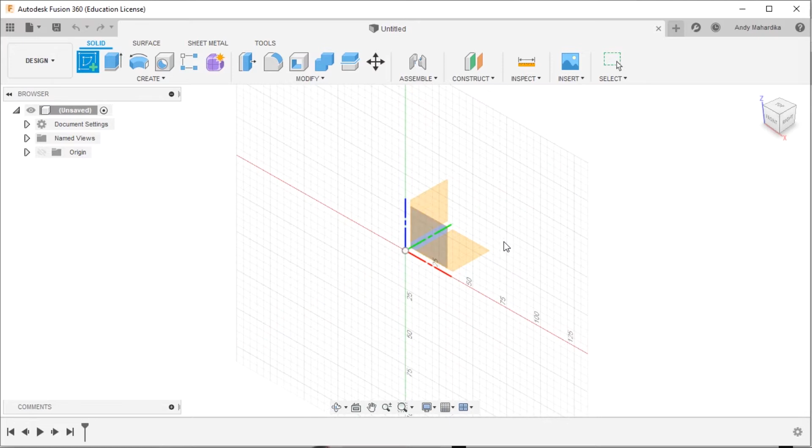We click sketch and select the top plane. First, we make a circle sketch here. For the dimension, click D for the shortcut, and make it 6 mm. Finish the sketch. We will extrude this sketch to let's say 14 centimeters, or 140 millimeters.

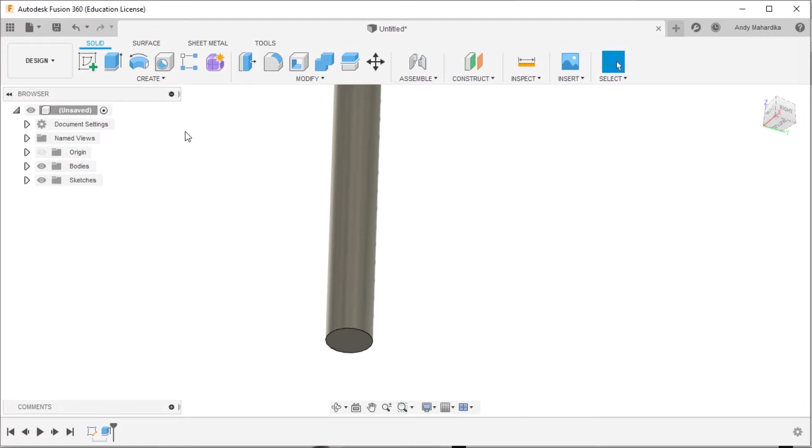In this video, I will make a Phillips screwdriver. So we'll make a cut here on this edge for the screwdriver point.

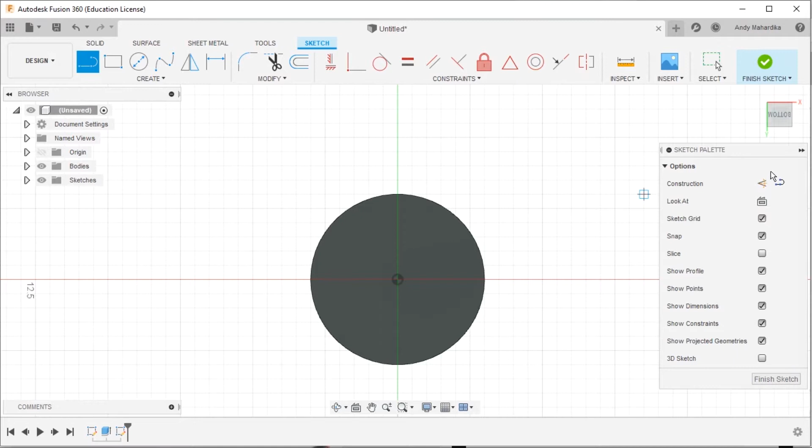We'll make another sketch. Click on sketch, and select this plane for the next sketch. First, I'd like to make a center line and make it a construction. Just click the sketch and make sure you click this icon here on the right to make it a construction.

Okay, just turn it off and make a triangle with this. Oops, sorry, let's undo this. Let's make a triangle, but not to this center point, okay? I'll make it just a little bit higher than that, like this.

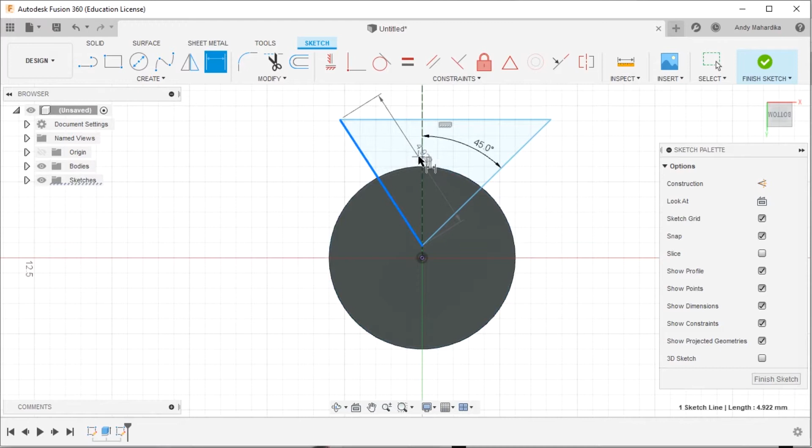Click, right click and okay. Make this horizontal. And for the dimension, click D. Let's make this 45 degrees. Also for the left side, make it 45 degrees. And the dimension from the center to this triangle edge, I'll make it 0.3 millimeters.

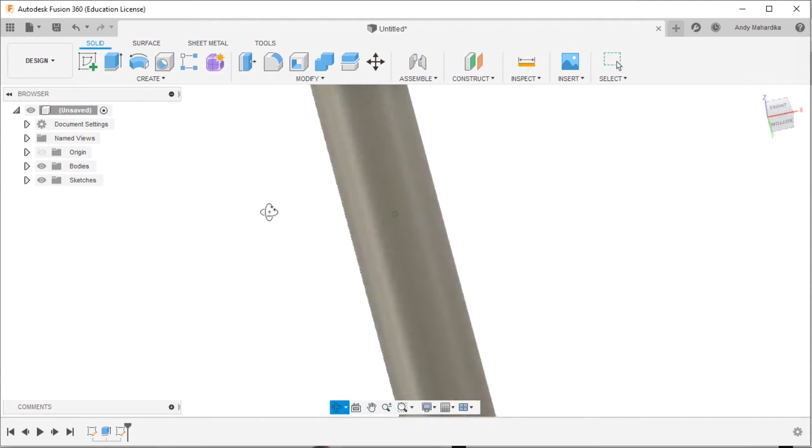Okay, then I finish the sketch. We will use this sweep command to cut this cylinder to make a Phillips screw profile.

But before that, let's just make another sketch, a second sketch for the sweep. First, create sketch. We will use this plane, the right or left plane. I will use the spline to make this. Just make 3 points like this. The dimension will be from this center. I will make it maybe 8 millimeters.

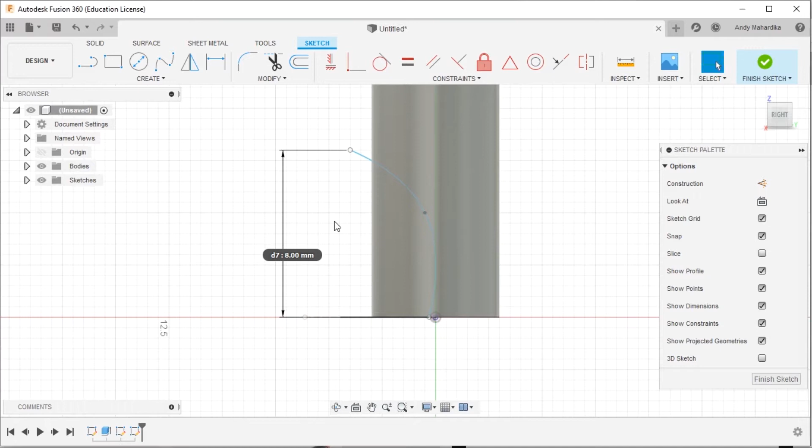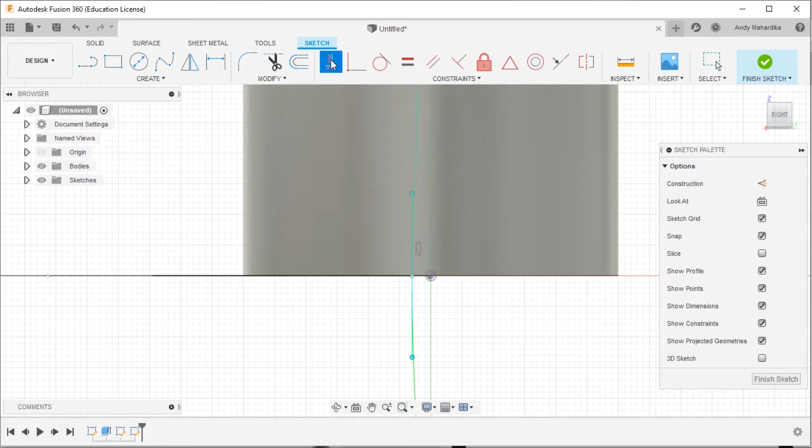Right click. And for this point, we can see this line here. We'll make it a vertical line. Just click the line here, see this line, then click the vertical constraint. Okay, right click and then okay.

Just make sure the line is pretty good for you, like this. Okay, you can see here the line is moving here, the dot here. Before we make a sweep, you need to make sure the line between the two sketches is connected. If you didn't do that, probably the sweep command will not work properly.

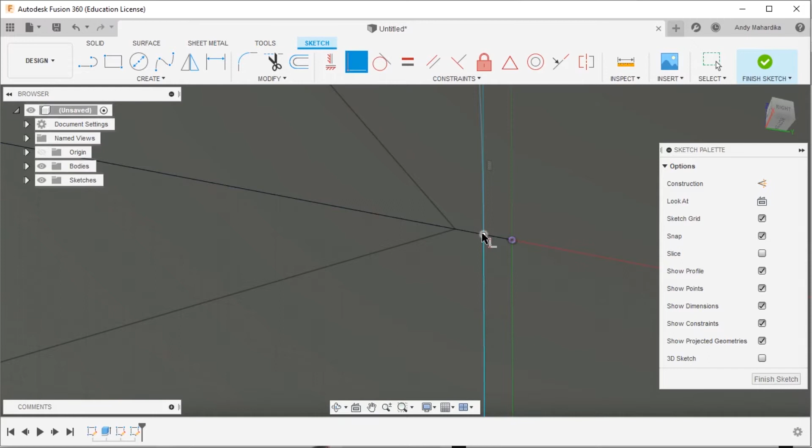Then we click this line, and then the second dot here. Okay, click this coincident constraint, and then select this dot here, and then the second dot from the first sketch. They will be joined together. Let's see from the right side. Right click and OK.

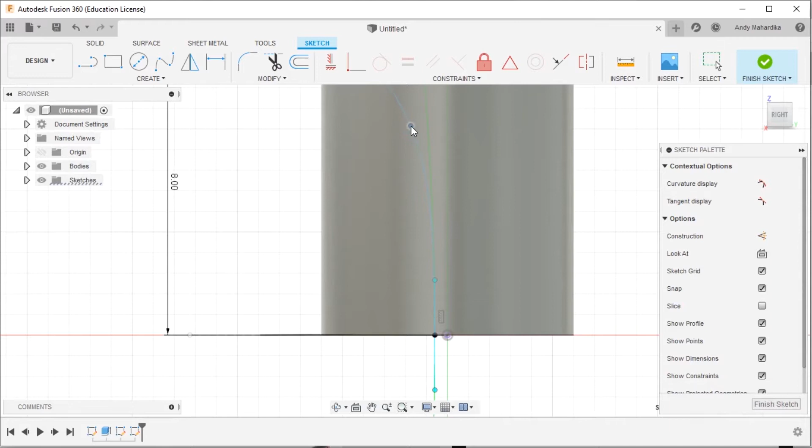If you're satisfied with the shape, you can just stop there. Finish. And then now we'll do the sweep. Create, sweep.

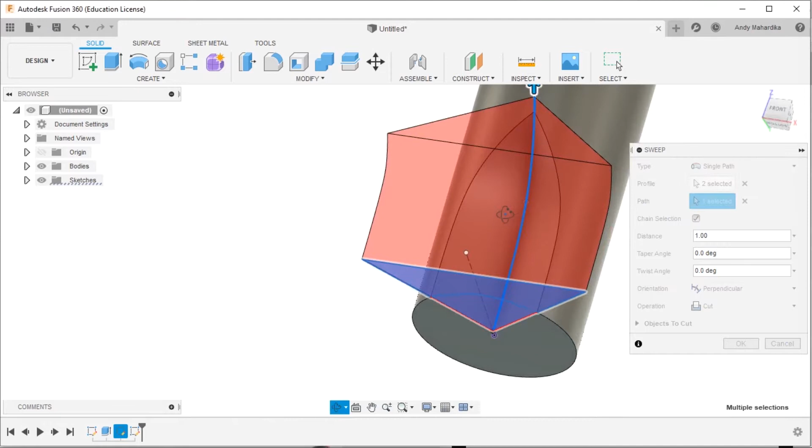Now we select the profile we want to make, this one. We use the single path. Profile here and here. And then the path, we use the second sketch we made, this one. Click here. See. Now we got this shape here. And then remember to select this operation into cut. And then OK. Now you already see we have a cut section here.

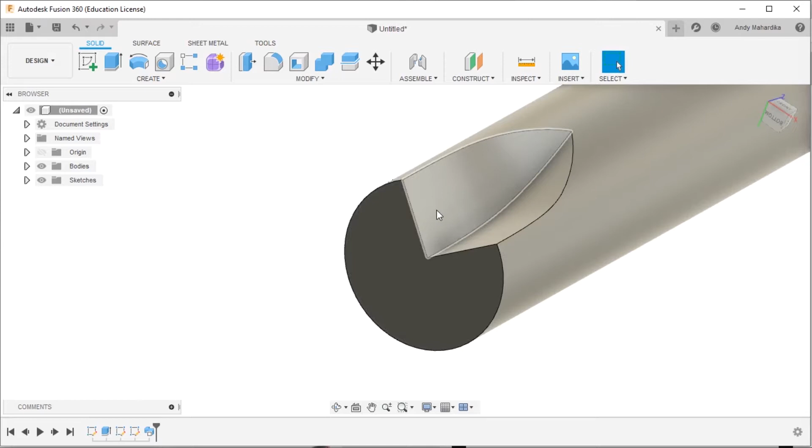Then we need to make this on 4 sides here: 1, 2, 3, 4. So we'll use this command, like this pattern, a circular pattern here. Go to create menu, then pattern, then circular pattern. Then select the object. Instead of faces here, I will select a feature.

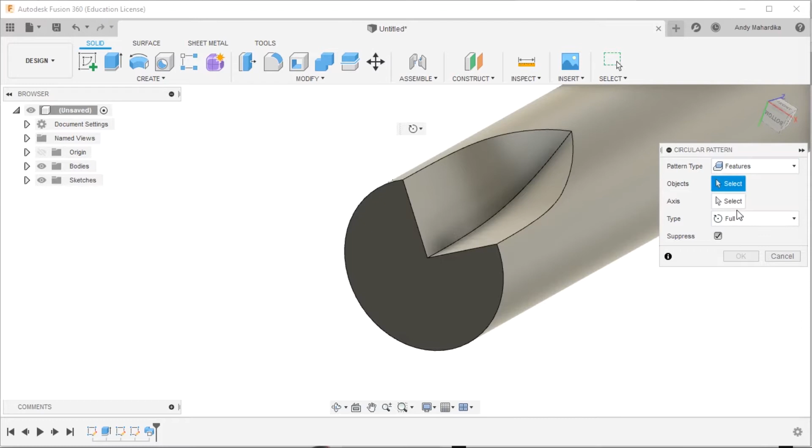And then the object we select is here, this one. And then the axis, we'll use this z-axis here, the blue one. Make it 3 - oh, I'm sorry, make it 4. You can see, and then okay. You can see there are 4 sides. And then we'll use modify here to make a chamfer.

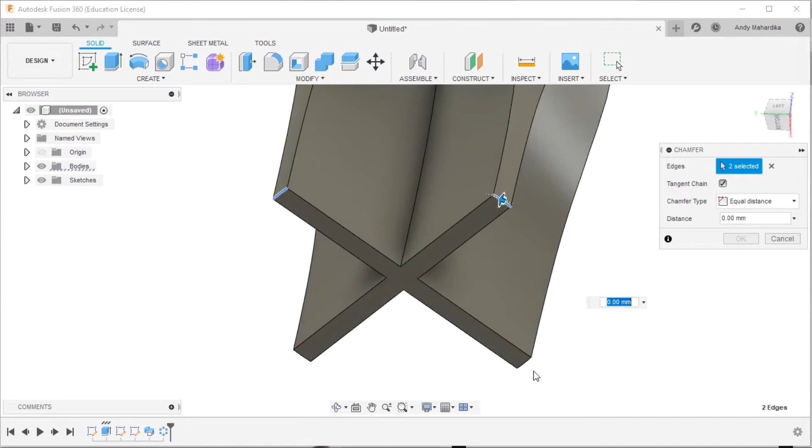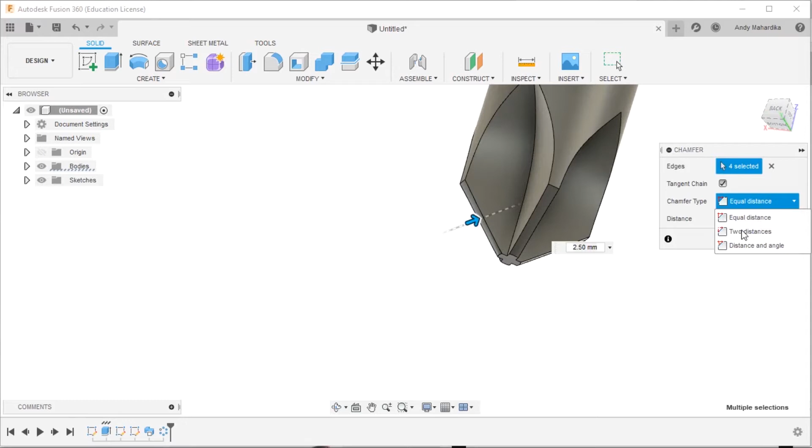Chamfer for every edge of the screwdriver here. Just make sure you select all 4 of this corner. See here. Instead of making this equal distance, I want to make this 2 distances here. The first one, I want to make it 5 millimeters. While the second one here, I want to make it like 2.6 maybe.

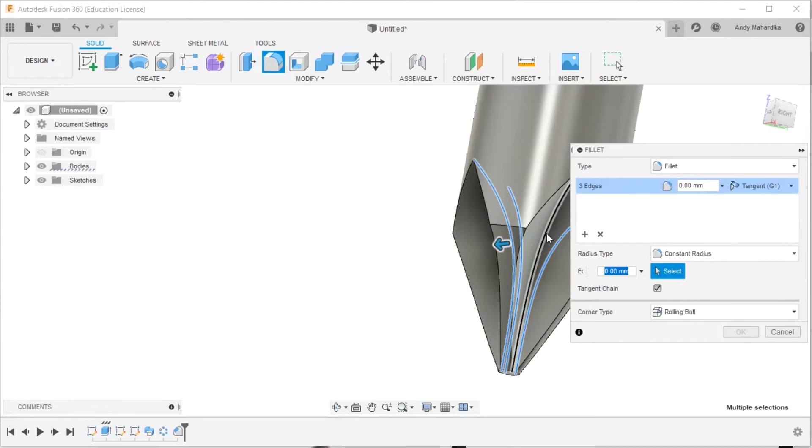Now the screwdriver tip is done. So I will make this a little bit rounded on every edge of this. Just a little bit of fillet, make it maybe 0.1.

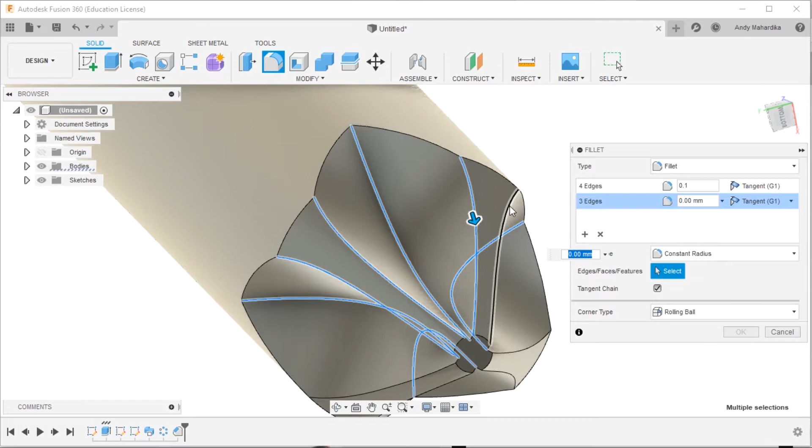I will add another one here, just to make another different dimension. You can click this plus sign here and add another fillet. We'll make another, maybe 0.05, a little bit smaller on the outside.

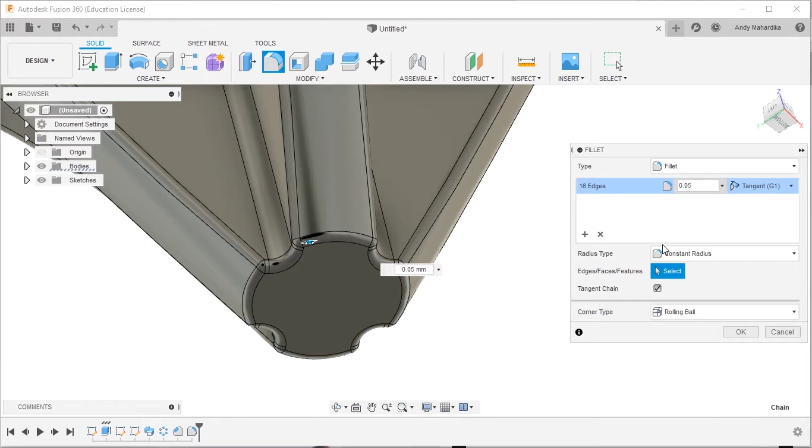And I will also make this edge into 0.1 millimeter. Oh, I think it's too much, let's make it smaller. 0.05, okay. No, okay, let's just keep it at 0.05 here.

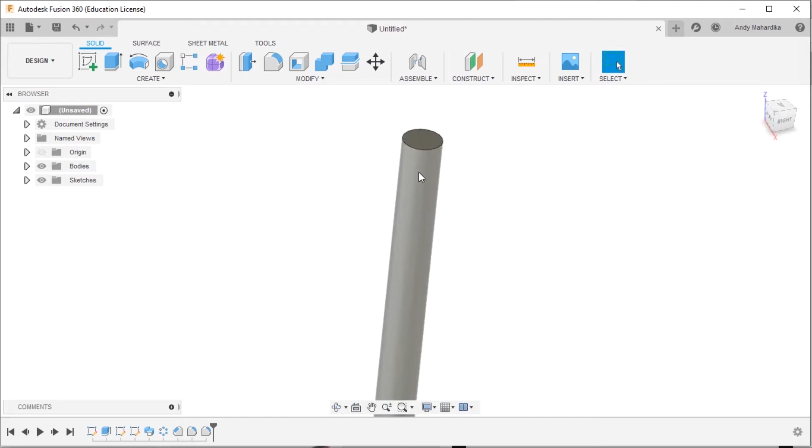Now the shape we already see here, we got this Phillips screw tip. And now, before we make the handle, I'd like to make sure that mostly the screwdriver always has like a flat surface on this joint between the handle and the tip here.

So I will make a cylinder - not cylinder, sorry, a circle here on the center. For the dimension, let's click dimension. I will make it just 8 millimeters, okay, maybe 10. Finish sketch.

Now we will extrude this sketch here. Instead of one side, I will choose the two side, or I will choose the symmetric extrude here.

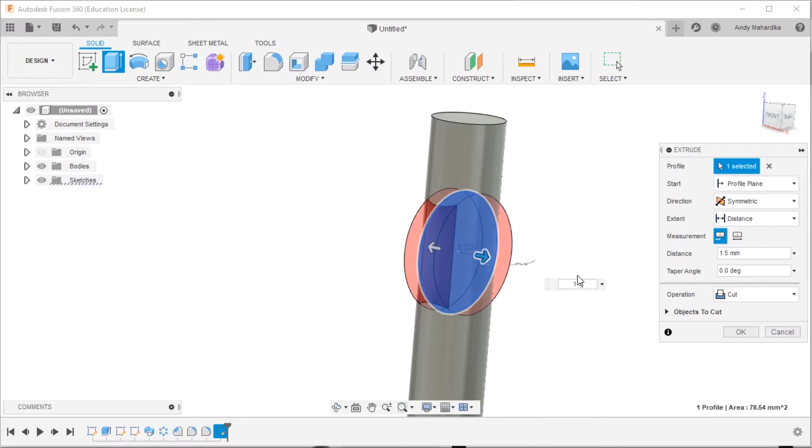The amount of this will make it 1 millimeter, 1.5. You can see here the extrude.

They already have the same amount between the right and the left because we use this symmetric option.

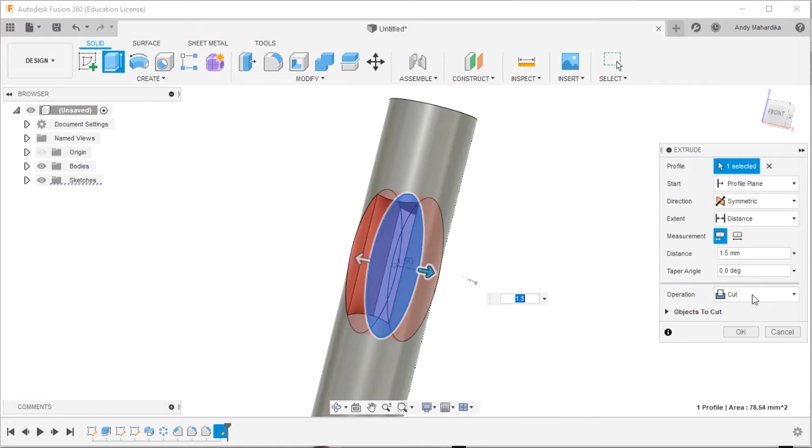This sketch will do a cut command here. For the operation, we'll change this into join, if that's okay. See, now we have a screwdriver tip here.

So next we will make a handle here. We'll make a sketch first, but for the handle itself I will make a different body part.

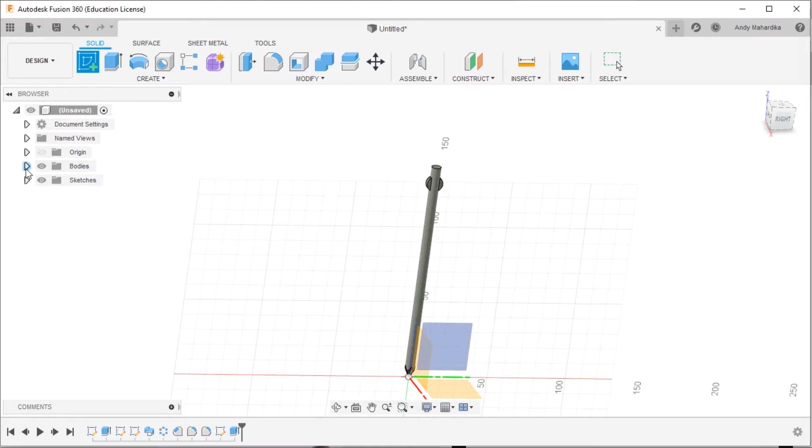So you can see here the first body we make, I will rename it into SD tip.

Oh, before that I will make a center line first. As usual, I will always use a construction line to make a center line. And then, okay.

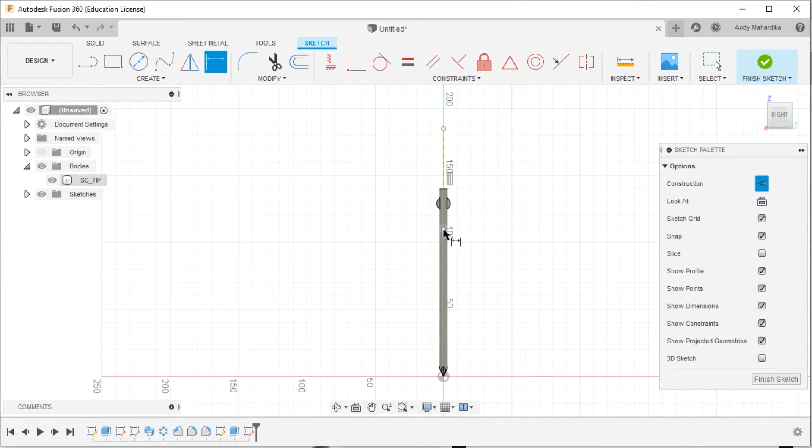We'll make a dimension here. From here to the tip of the screwdriver will be 90 millimeters.

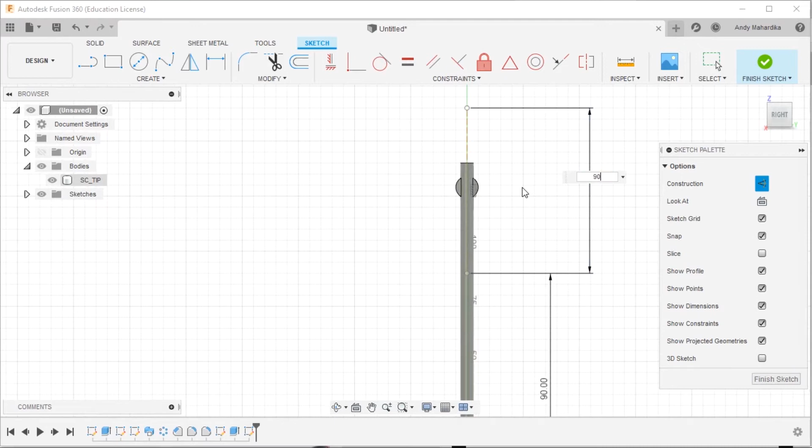And from here to here will be, let's say, another 90 millimeters. Okay, right click and cancel.

Now we'll make a sketch here. Oops, sorry, just turn off this construction button here. We'll make a sketch from this to this.

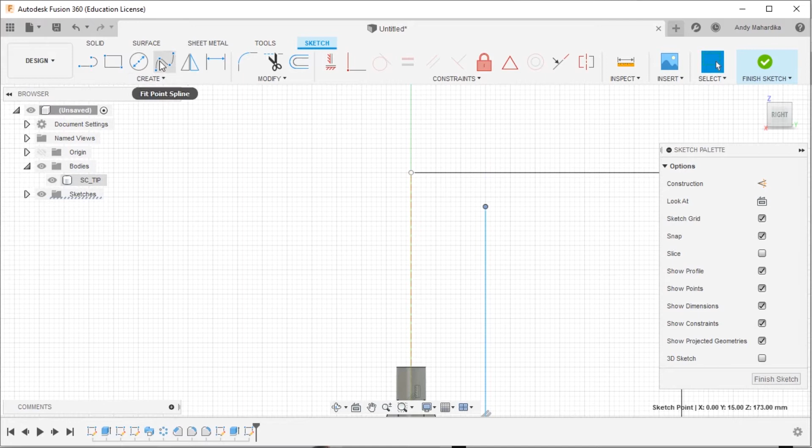Right click and then okay. I want to make a spline here for the end of the handle. Let's make it 3 point. Right click and okay.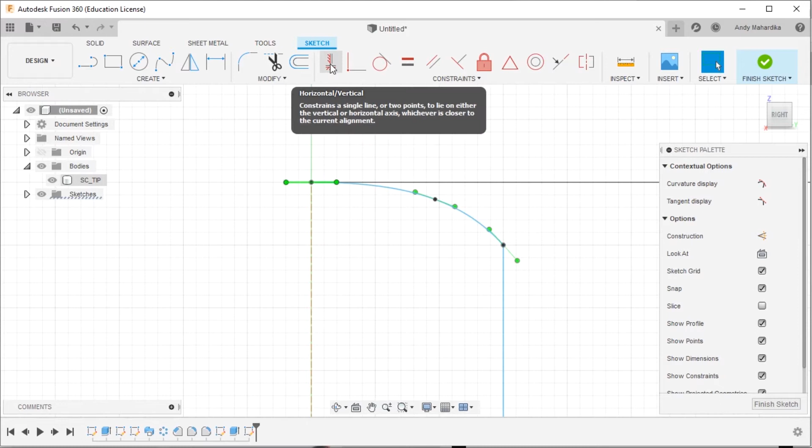Just make it a little bit higher. You can see this line here. Just make sure it's on horizontal, so I will select this horizontal constraint here. Right click and okay.

And I also want to make another sketch here for the screwdriver handle. Just make it 15 millimeters.

And the distance will be from here to here. I'll make it 15 millimeters. Right click, cancel.

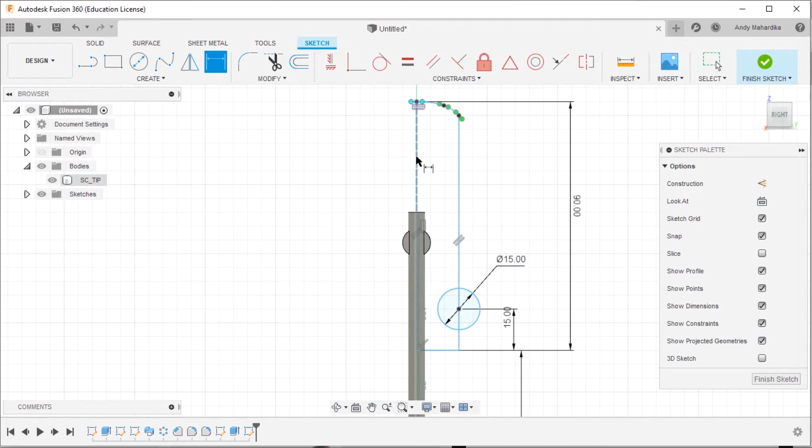You can trim this sketch or not, it depends on your need. Oh, I forgot to make the dimension from here to here, will be, let's say, 12 millimeters.

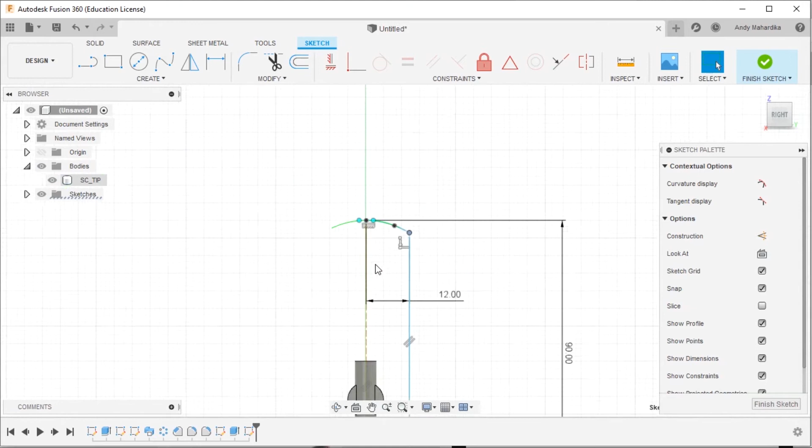Right click and cancel. Okay, we'll adjust here a little bit. Oops, seems like this.

I will make sure it's vertical with this line, with this dot here. Okay, just select horizontal, vertical, horizontal constraint, click this dot, and then this center dot here.

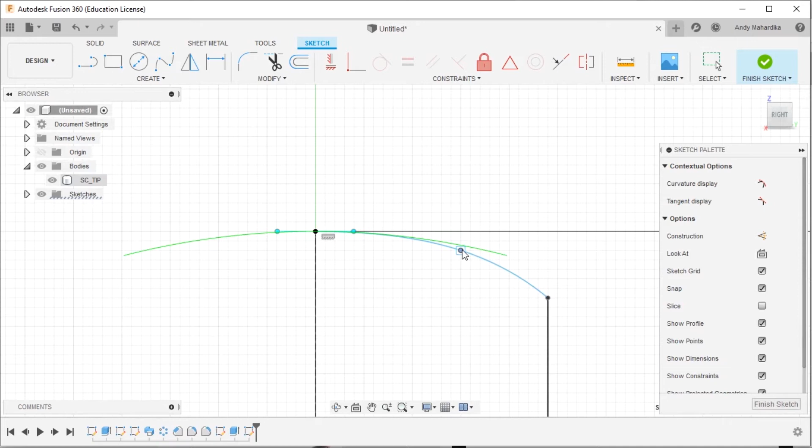Now you can see the line is collinear with this dot here. Right click and OK. Just make sure the sketch is good, and then finish sketch. Now it's time to revolve the sketch.

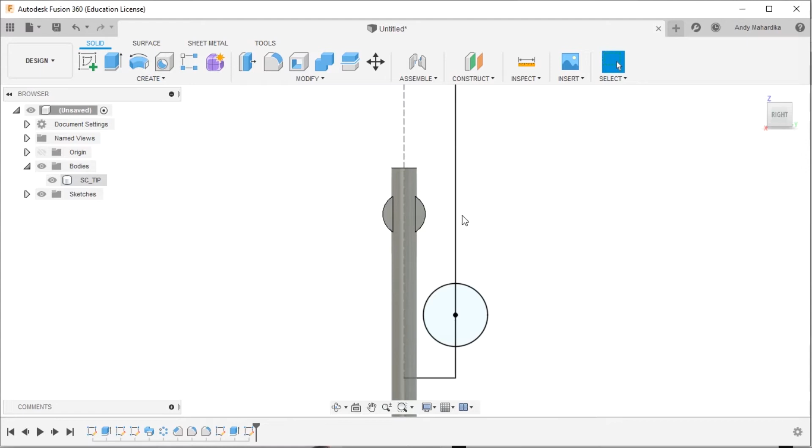Okay, now we have this revolve command here. Just click, and now we select the profile you want. Oops, sorry, cancel, I think right click, edit sketch first.

I think we need to change this into the non-construction line here. Just switch it off, finish. Okay, you can see here.

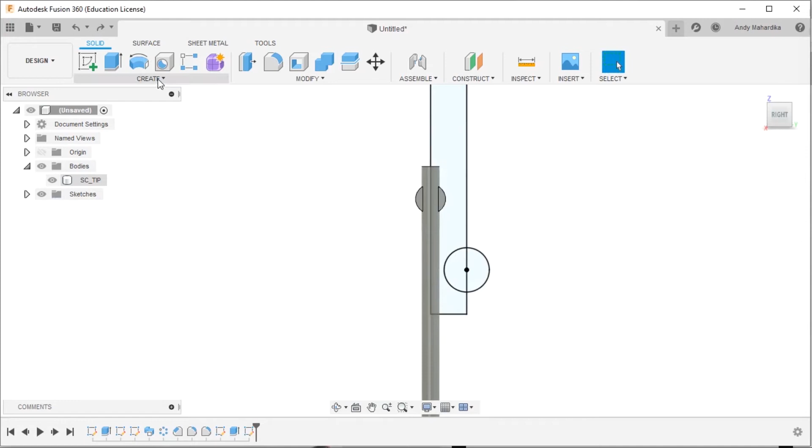And as for the axis, select the axis, and then we can use this sketch here. Okay, oops sorry, let's undo this. Revolve, select this profile, select the axis.

The operation will make this not join, not cut, but a new body. Okay, you can see here.

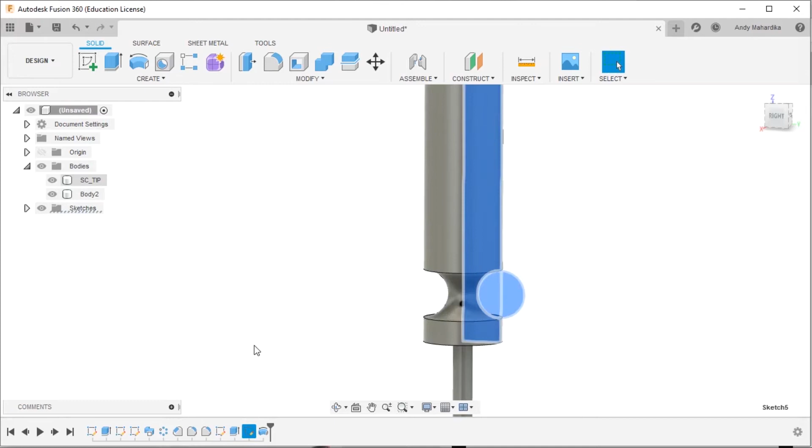Seems like this groove is a little bit bigger, so I will edit the sketch here. Right click, edit sketch, we'll make it smaller, like 10 millimeters maybe. Okay, finish sketch, okay, I think it's enough.

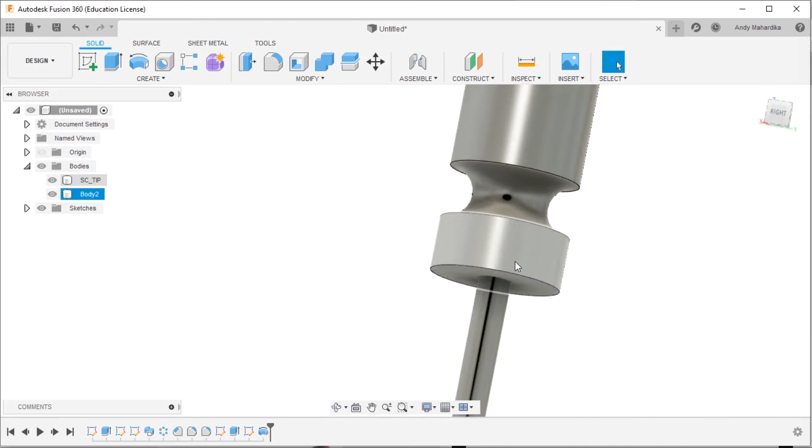Now the screwdriver is almost finished. You can see here the handle, but now we need another profile to cut this screwdriver handle, so you will get extra grip when you twist it.

Make another sketch. We'll use this plane here. I will use another circle to cut this. Dimension will be, let's make it 6 millimeter.

Okay, right click, cancel. I will also make this vertical constraint between this sketch and this line. Right click and OK.

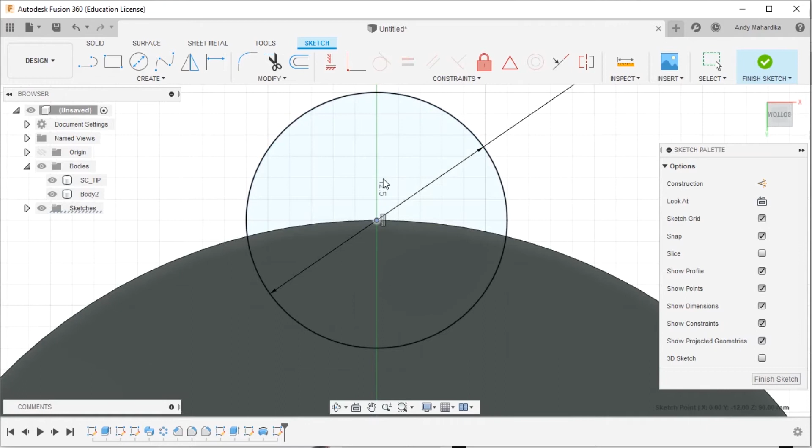To edit more sketch here, we need a circular pattern here, so I will make a sketch like this. Create circular pattern.

Let's select the object. This is the object, and select the center point here. We'll make it like 6.

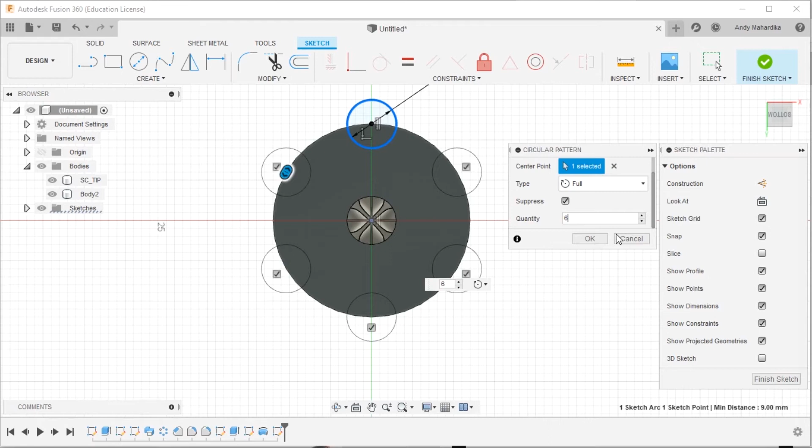And click OK. I think we need to make it a little bit bigger. Let's make it 8 millimeter. Oh, we'll just let it be 6.

Okay. Oh, 7 maybe, I will make it 7 mm.

Okay, finish sketch. You see here, and then all we need to do is extrude this sketch here, all of this sketch.

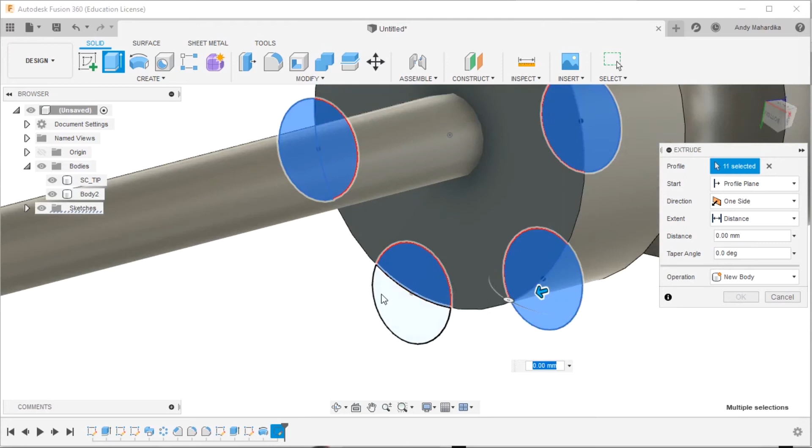We'll drag it to cut this here, all through the object, and then okay.

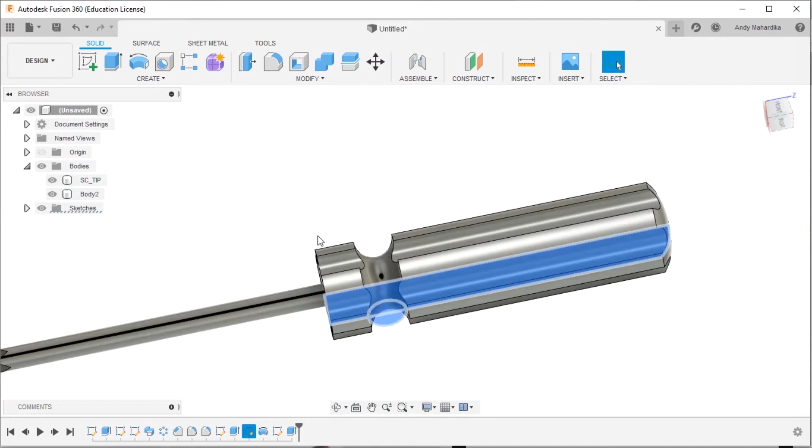It seems like the sketch is still a little bit bigger here, so I will return to this history. This one, okay, right click, edit sketch.

Okay, the size is pretty much good for me. And then we'll make a chamfer here, another chamfer on every edge of this handle.

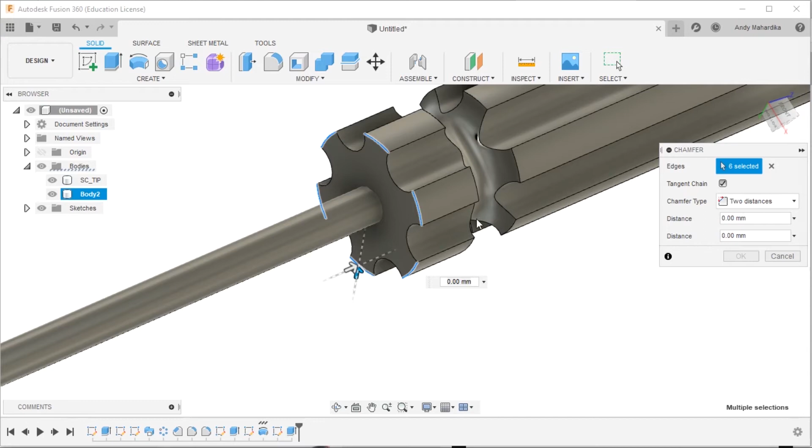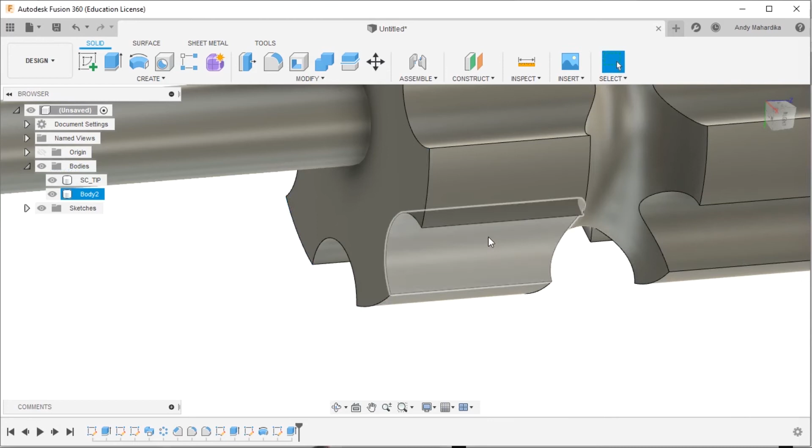Like before, I want to make two different distances between the chamfer. The first one will be... let's make it 3 mm. Oh sorry, there's some error, cancel. Maybe I will cut this part with another command. So on this revolve, I'll just edit it on the sketch itself. Edit sketch - it's a little bit too far. Maybe I'll make it 10 mm, and then I'll make a chamfer here.

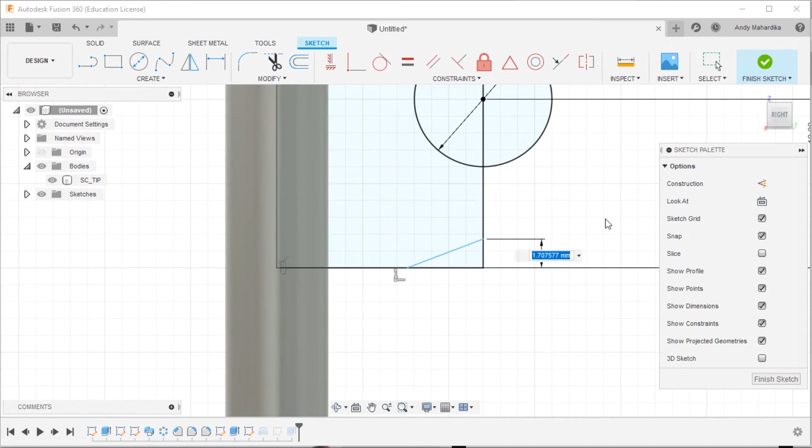Sketch, and then we'll trim. The dimension will be here to here, like 1.5. And here will be 4 - maybe just make it 6. Finish sketch.

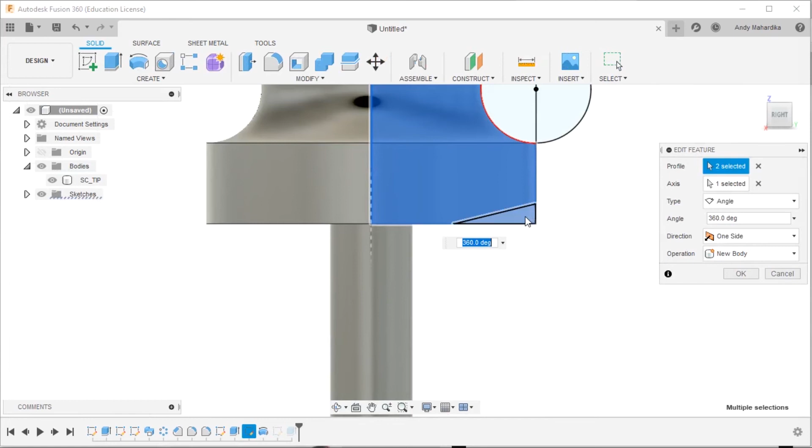The revolve, right click, edit the feature, and then deselect this part. Okay, now you can see this almost done screwdriver handle.

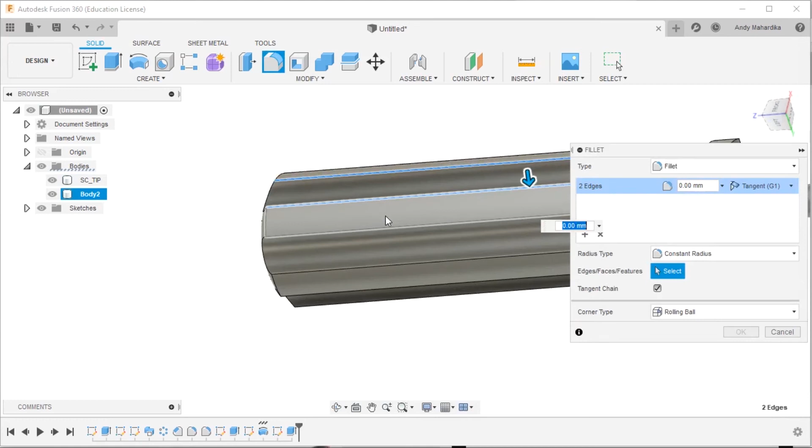I will add a little bit of rounding on every edge here. You can select like every edge of the handle here.

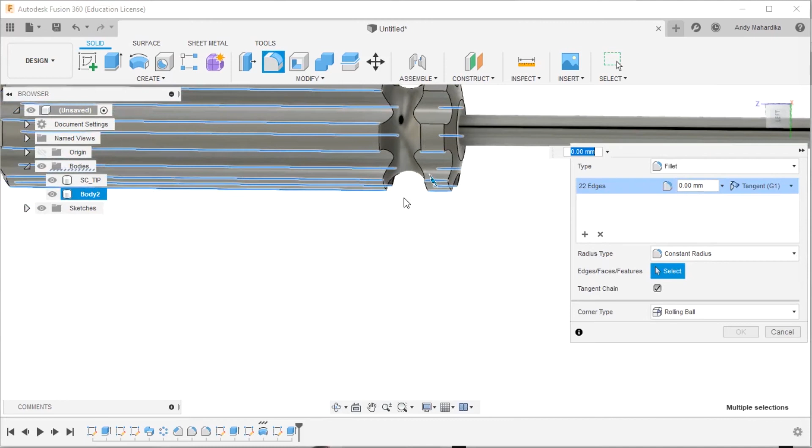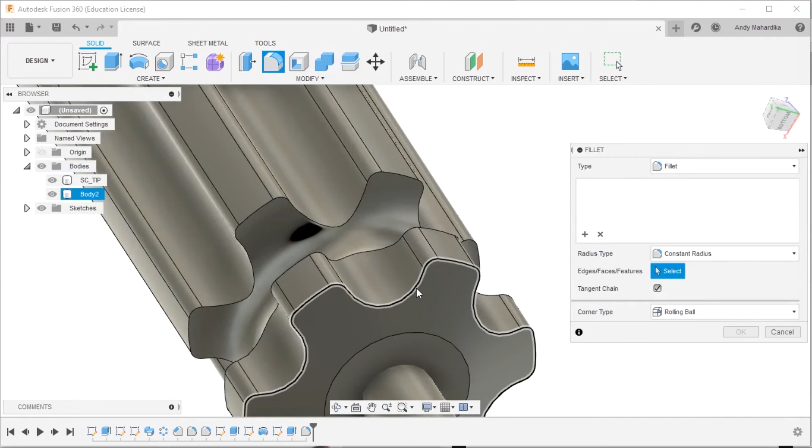Okay, let's add maybe like 1 mm rounded. We also add another rounded here, another 1 mm. Then okay.

Now you see this, actually we have two bodies here. Let's rename this with handle.

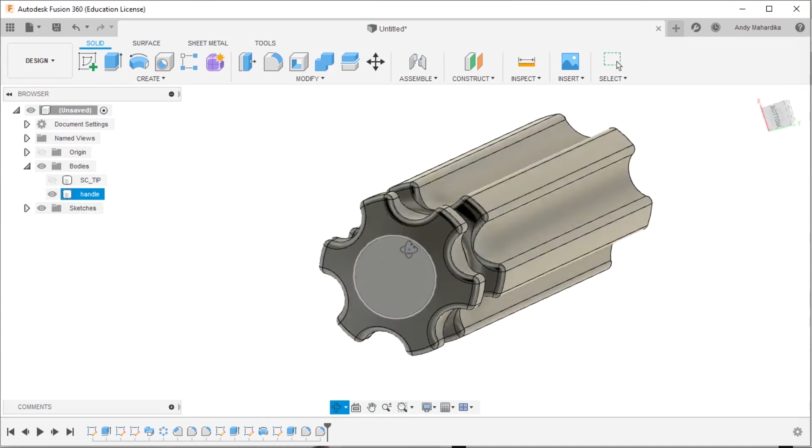If we hide this screwdriver tip, we'll see there's no hole in this handle. So I will make a hole with this command here, combine. So I will use this screwdriver tip as a tool.

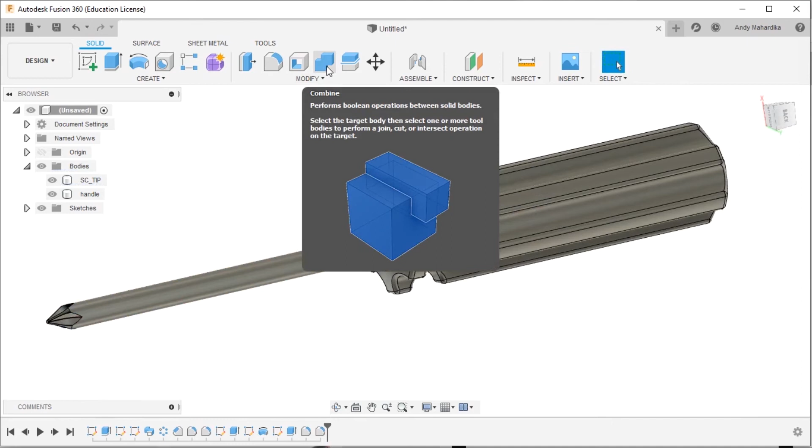Let's click this command, target body, choose the handle, and for the tool we use this screwdriver tip. Click, and then we select this cut option here. So you will see the body itself got a little bit of a hole in here.

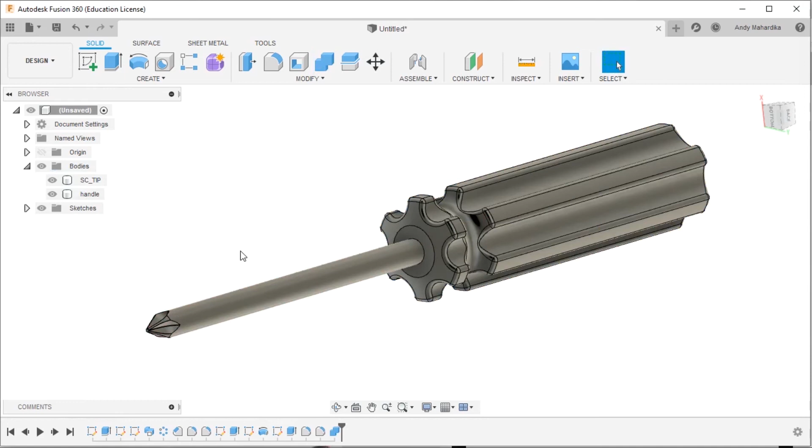But we need to keep the tools here. So normally when you select this option and hit OK, the tool will be gone. But when you keep the tools, the tool will stay there. When we hide this body, now you see there's a hole inside the handle.

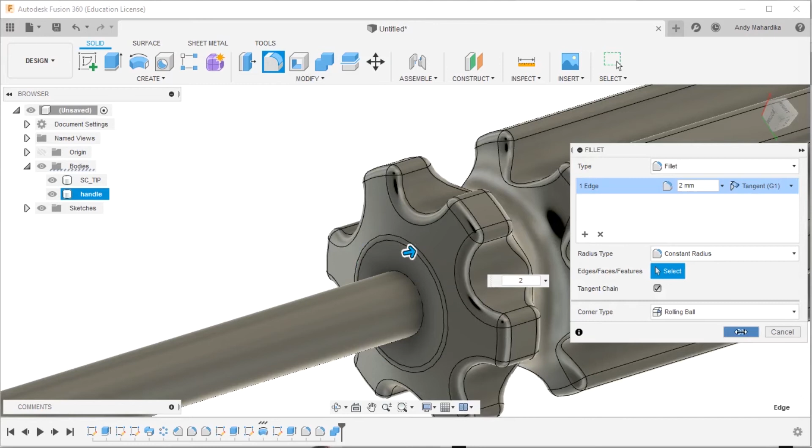Now we'll add another rounded here, let's say maybe 2 millimeters. Okay. Now click home. Now you can see the screwdriver is done.

Now let's put some materials in it. To put materials here, we'll select this design and put it in render. Let's minimize this to make a better view. We will use for the material this appearance here. Click.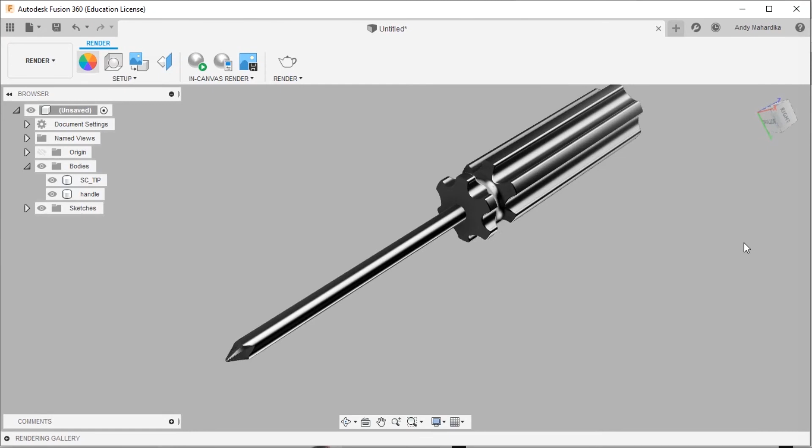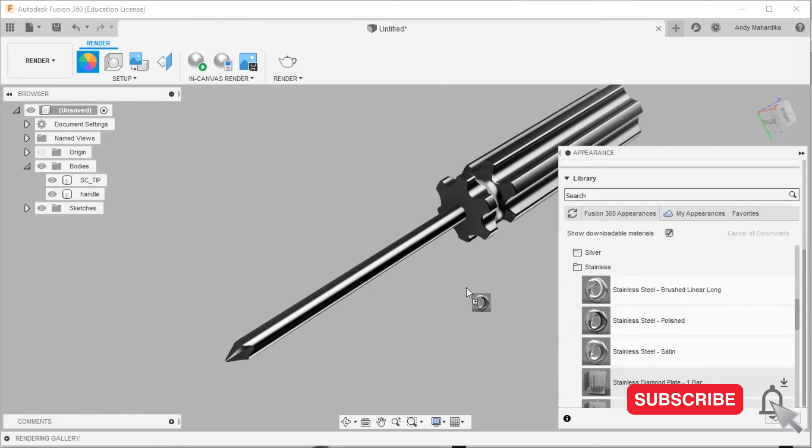Fusion 360 itself already has some material library like metal, plastic, liquid, or anything else like paint. So I will use this metal, chrome, copper. Okay, I will use stainless maybe to make it a little bit more shiny. I'll choose steel polish, and then I will drag it into this screwdriver tip.

Okay, then we close. Next I will use paint for the handle. Oh, maybe I will just use this plastic material. I will use ABS here.

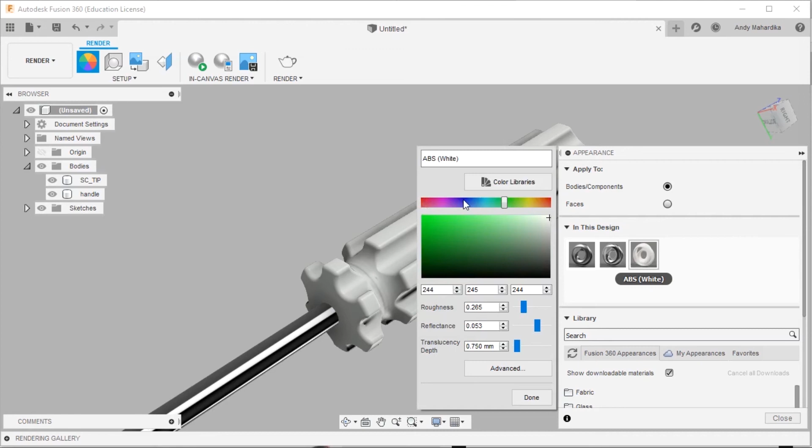Okay, maybe I will also put a multi-material or multicolor here. We have this ABS white. We'll double click this one, change the color, change it into - I like blue, let's make it blue. Oh, a little bit lighter. Okay, done.

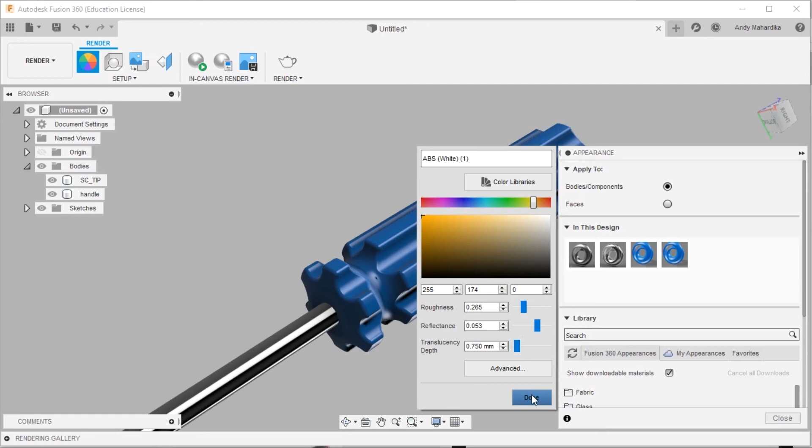Next we will duplicate this material, right click, duplicate. And now I will change this color into - make it orange maybe. Done, this orange.

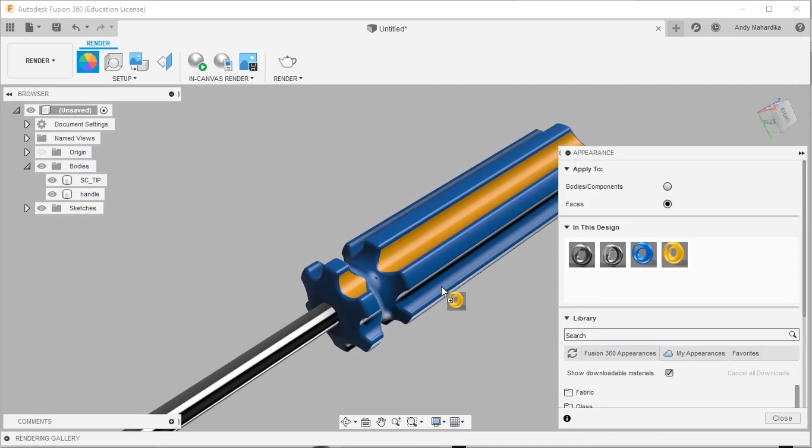Before we selected this option like body and component, but now we'll use this face option to put the materials here. So I will drag this into every groove here, so we'll have orange color on this handle.

Right? Let's just close. Okay.

When it's done, it's time to render this object. Click render. Sorry, you need to save your design before using this render, okay - I forgot to save this. Let's click save. As usual, Philips screwdriver.

Let's put this in Fusion 360 material. Okay, now it's time to render this object. To render this, you just hit this render. You can choose the - maybe you want to print, you can use this print. I will choose this size with this setup: render quality final, render with cloud render.

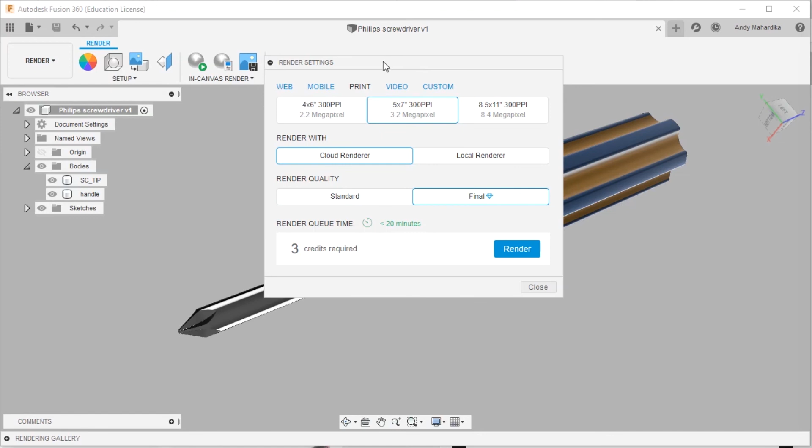I always use cloud render for this job because the result is always better than the local render. When you select local render, it means you render with your computer hardware. Okay, now we hit render and wait - it usually takes some time because it's cloud render.

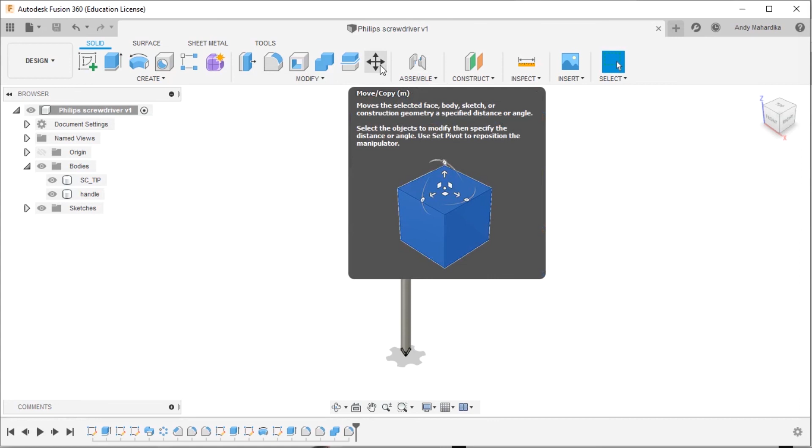Let's go back to the design. Click this home. Okay, you see this object I made? It stands up vertically, so I want to make it lay down horizontally. So I will select this move/copy bodies, make sure this body option, select this handle and also the screwdriver tip, and rotate it maybe 90 degrees, then hit OK.

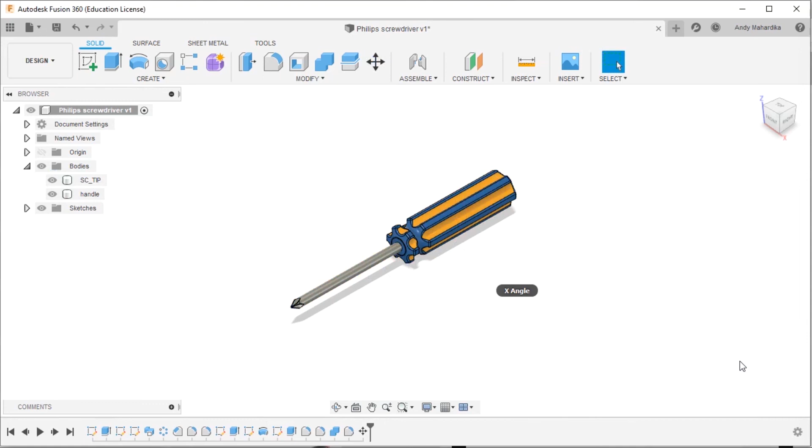You can see, so the shadow will be dropped here. Okay, I will just save here, and then you choose another render option.

We will hit another render button. So we'll just hit this render. Cloud rendering is in progress, let's see. It will take some time.

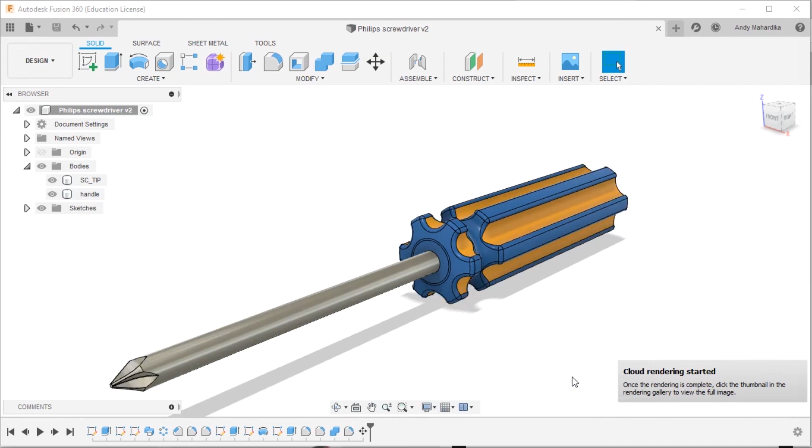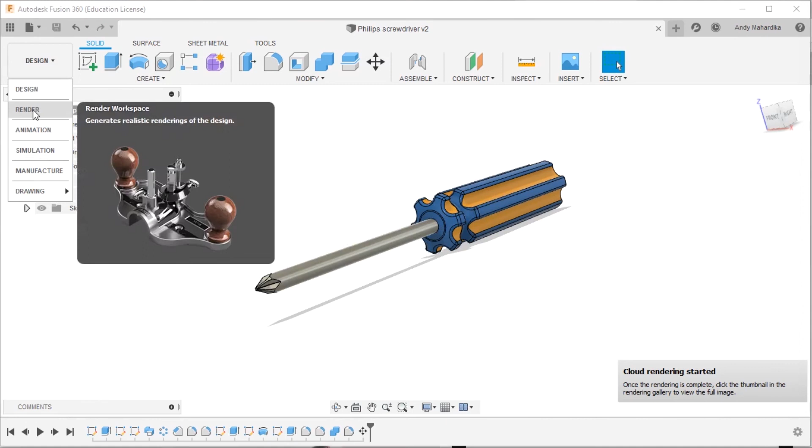Let's change the camera into perspective view, so the shape will be a little bit better to see while we wait for the rendering progress. You can see here. Now we'll see the render result - we can see the render result here.

When the render is finished, you can click here to see the rendered file. You can also save this file into your computer - just click download, you can change it, save it in PNG, JPEG, TIFF, or EXR. Maybe I will use just a JPEG file here. Save.

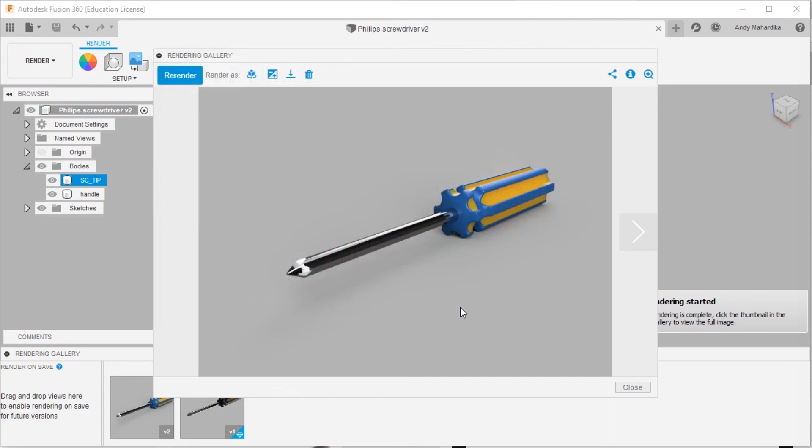We save, then close. Let's go back to the design.

Now you have yourself a screwdriver 3D model in Fusion 360. I hope you enjoy the video.